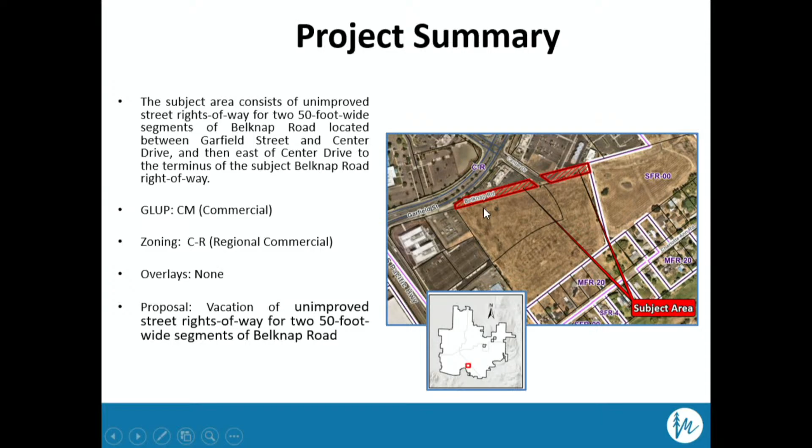Begin by looking at the project summary. So the subject site is located in South Medford. It consists of unimproved street rights-of-way, both 50-foot wide, on each end of the terminus of Center Drive. We're all familiar with the surrounding area.

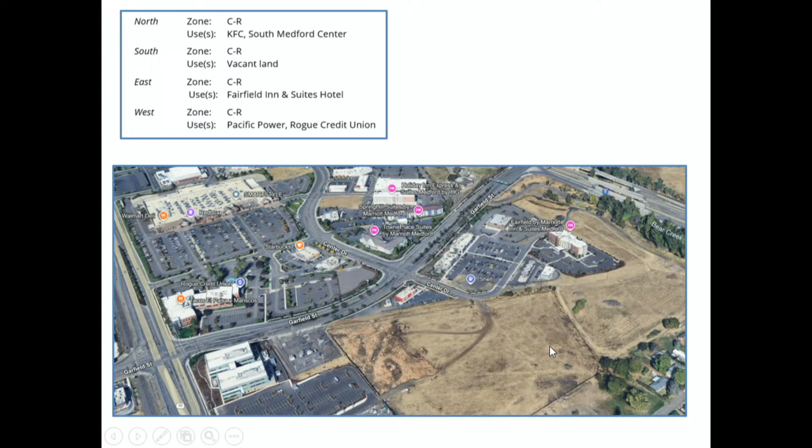Just abutting the property to the north, or the vacation area to the north, is the KFC. You have the South Medford Center to the north. You have the Fairfield Hotel. And just to the south of the property is a large vacant area, and this was, just last year, approved by this body for a subdivision by the applicant CEG, and it's their intent to develop in the future with commercial developments.

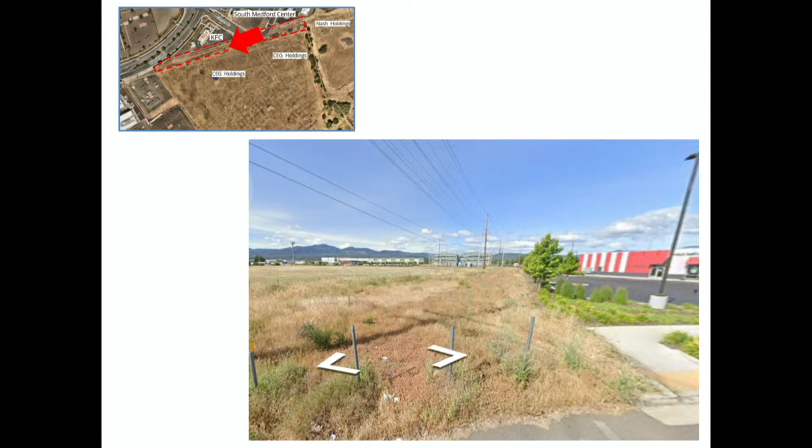Here's a couple of images of the site. This is looking west from the end of Center Drive, and this is looking east. So Belknap Road is currently, as you can see, an unimproved right-of-way.

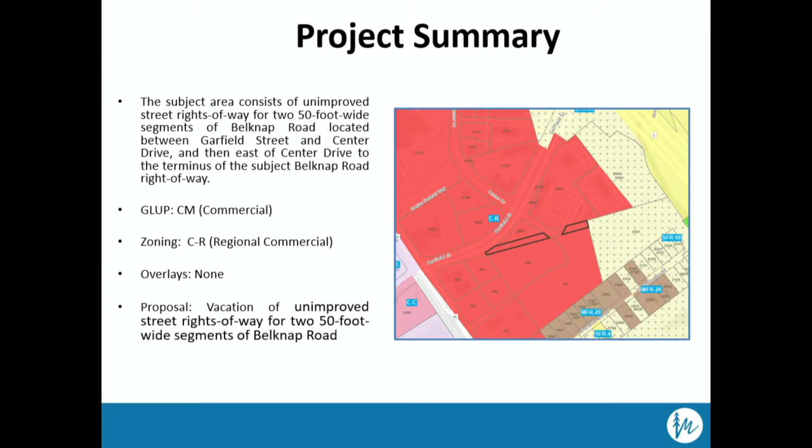Site's general land use plan designation is commercial. The underlying zoning classification is regional commercial. There's no overlays associated with the site. And again, the proposal is for the vacation of two 50-foot wide strips of Belknap Road.

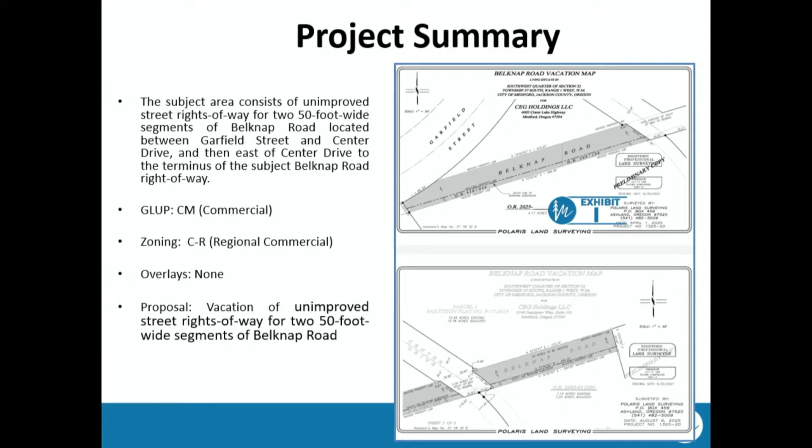Moving along, I'll give you a little bit of history. This vacation was approved on Belknap in 2017, as you can see in the exhibit map. At the time, they vacated just 0.38 acres. It was proposed to vacate the entire area at that time. However, the owners at that time only wanted the 0.38 done.

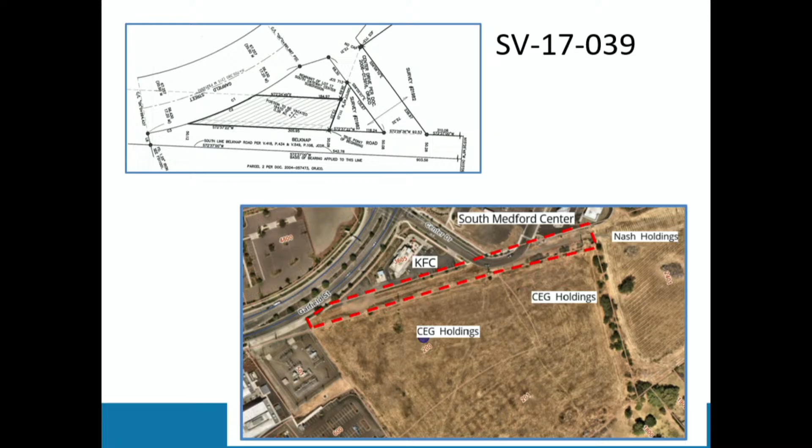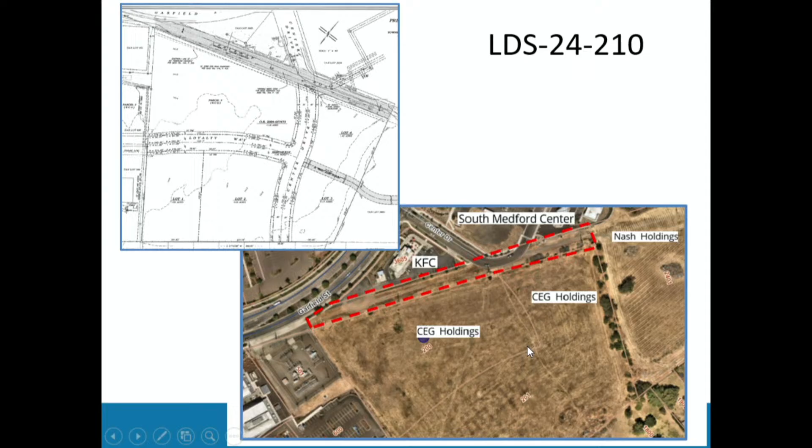And finally, the request is again for each end of Center Drive, these 50-foot wide strips of right-of-way. Upon the approval, the land will be vested to the two adjoining property owners.

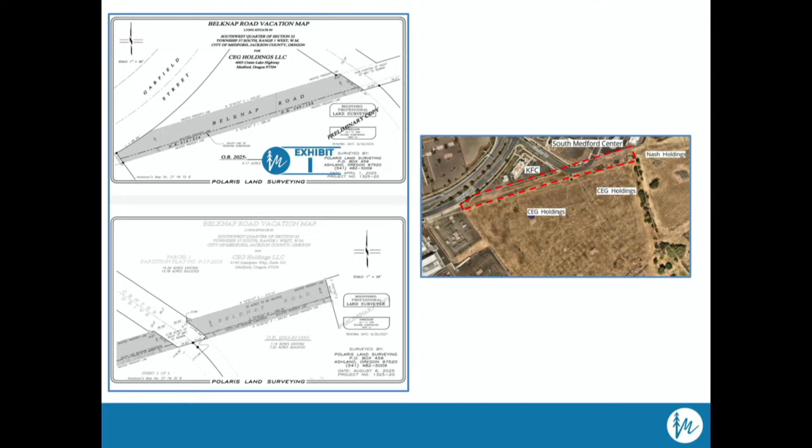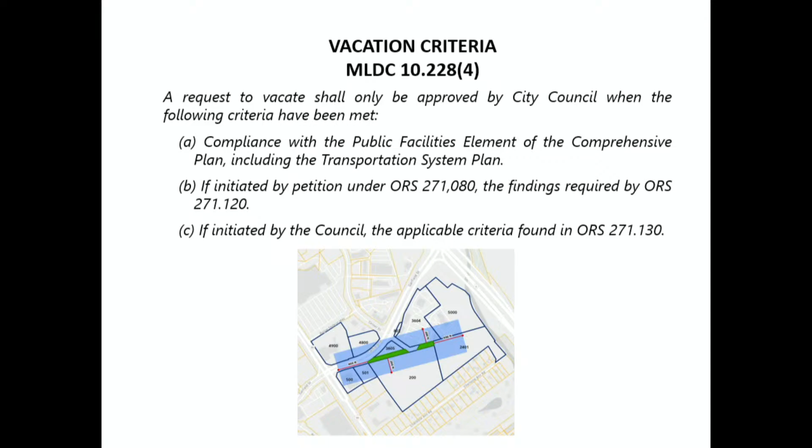So we're right into our findings and recommendations. The commission can find that the criteria have been satisfied. The applicant did provide this map of the affected areas. So we received no oppositions from any adjoining or affected property owners throughout this project.

So they do meet the criteria. Based on the findings and conclusions that all the approval criteria are met or are not applicable, we ask that you forward a favorable recommendation to City Council for approval of SV 25-141. That's per the staff report dated September 4th, 2025, and it includes exhibits A through L. And with that, I can take questions.

Thank you. Okay, thank you, Dustin. Any questions of staff? Okay, not seeing any, thank you. So with that, we will open the public hearing and ask the applicant or their agent to come forward and talk about the project.

Good evening, Commissioners. My name is Seth Adams. I'm with CSA Planning. We have offices at 4497 Brown Ridge Terrace here in Medford.

We are the agents for CEG Holdings, which owns the L-shaped parcel of 7 acres to the south, which Dustin just mentioned is currently starting public improvements for a subdivision. Rogue Credit Union now owns the other abutting parcel to the south.

Throughout this process, our clients have coordinated a lot with the city, as well as the abutting property owners, being Rogue Credit Union and Nash Holdings, who also own the South Medford Center. So I'm just here to say our clients are fully in support of the vacation, and based on our coordination with the other property owners, we presume that they also support the request.

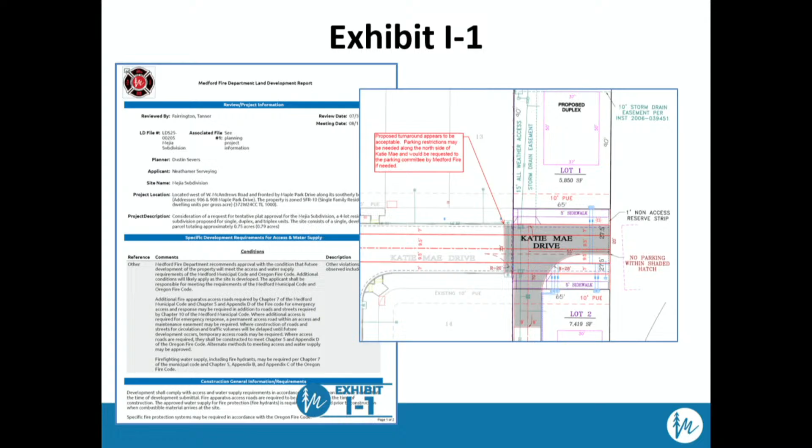In their original report, they asked that the applicant provide an illustration of how they're going to meet the turnaround standards for their fire trucks. Since the time the staff report was published, the applicant did meet with the fire department officials, and they did come up with this illustration on the screen, so that has been satisfied. So we'd like to include Exhibit I-1, which will replace Exhibit I.

Looking at our project summary, the site consists of a single developed parcel totaling approximately 0.75 acres. There currently is a single-family residence on the property. There's also some accessory structures. The property is fronted by Maple Park Drive along its southerly boundary.

Maple Park Drive is a Jackson County maintained road. It's classified as a standard residential street. You also have Katie Mae Drive to the north. It's terminated at the westerly boundary of the site. So with the development of this parcel, they will be extending Katie Mae Drive to this easterly boundary where they will run dead into this house that is constructed here.

So to address the elephant in the room, this house was approved, I believe, well before Katie Mae was constructed, with the Dahl subdivision. Hopefully something will happen in the future and we'll eventually be able to make it to the east. But we certainly have a clear trajectory to go west to make a connection to where Katie Mae is currently terminated.

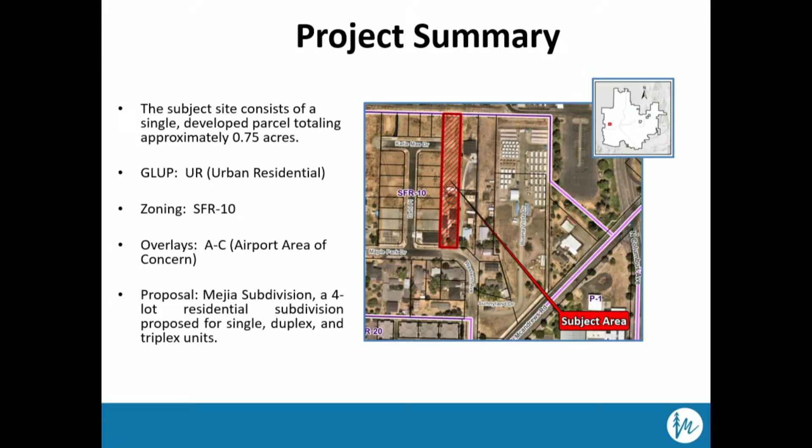Look at the surrounding area. To the north is industrial, also some industrial. Actually, this is the camp. I believe that's the urban campground to the east. Abutting the property is the Dahl Place subdivision, though this image is a little outdated. I believe all the homes here have been constructed at this point, and it's single-family residential to the south.

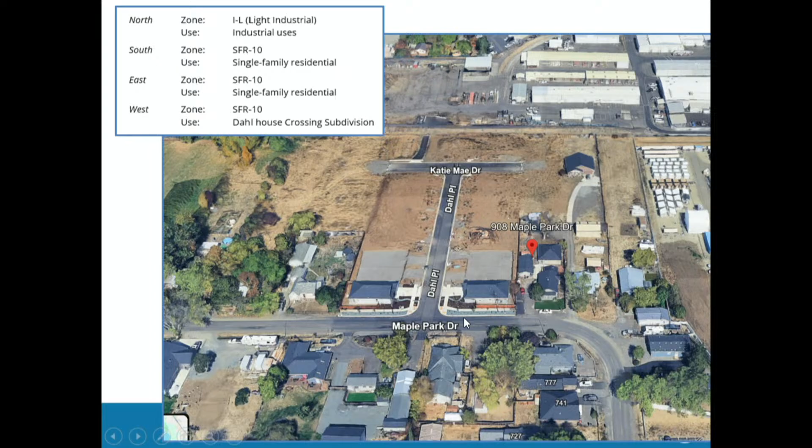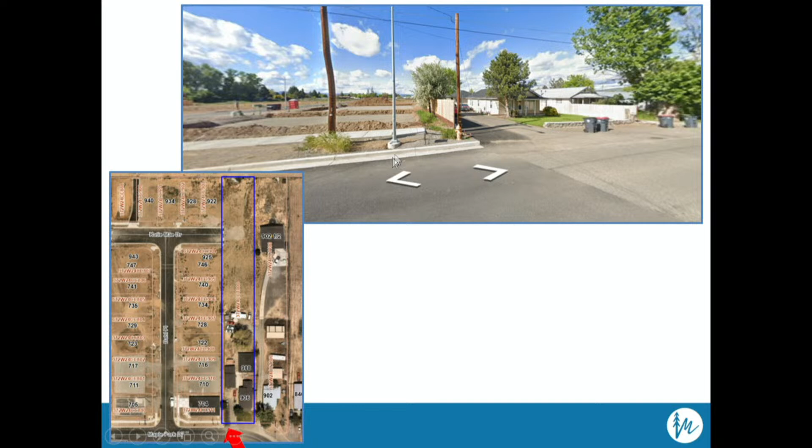Here's an image of the subject site looking north from Maple Park Drive. Again, this is outdated. All these homes have been constructed on Dahl Place.

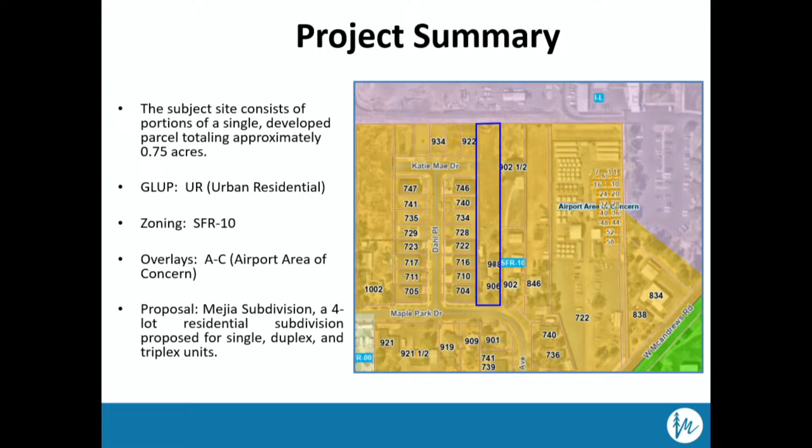Site general land use plan designation is urban residential. Its zoning is SFR 10. It's in the airport area of concern. The proposal is for the Mejia subdivision, a 4-lot residential subdivision proposed for single, duplex, and triplex lots.

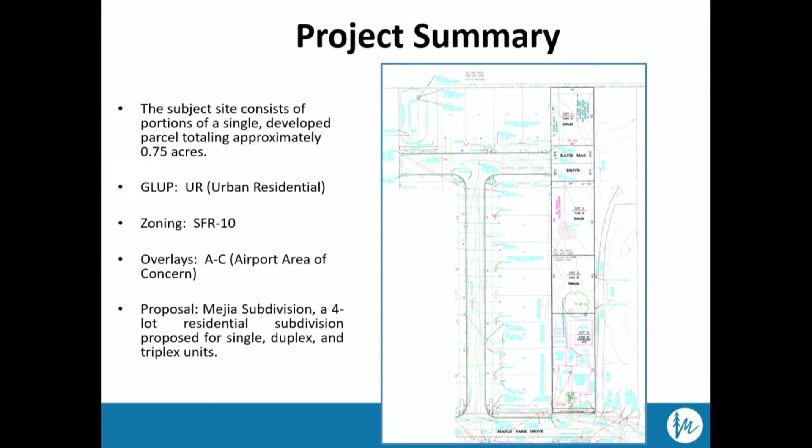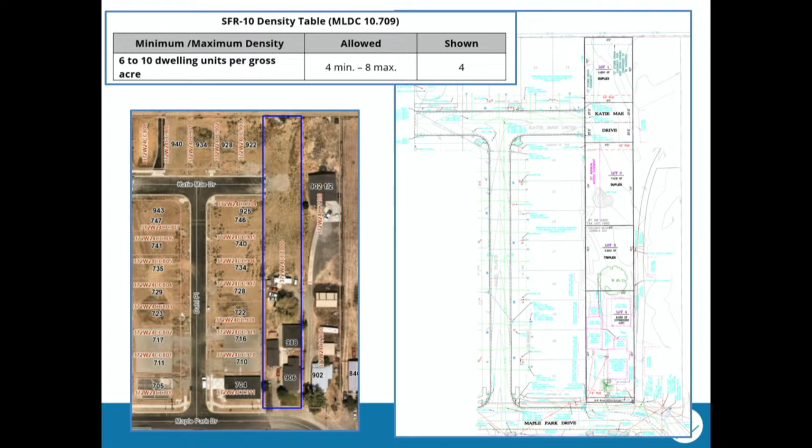The first thing we'll look at is density. Based on 0.79 gross acres, 4 units does meet the minimum requirement for the zoning and the size of the lot. Next, we'll look at the dimensional standards for the SFR 10 district.

So this one's a little unique. They're proposing standard lots, duplex lots, and triplex lots, which all have different dimensional requirements. First, we'll look at the duplex lots, lots 1 and 2. They meet all of our dimensional requirements.

Lot 3 is proposed for a triplex. I should also point out that lots 2 and 3 have a proposed minor minimum access easement, which does require an extra 10 feet of width, and they do satisfy that requirement.

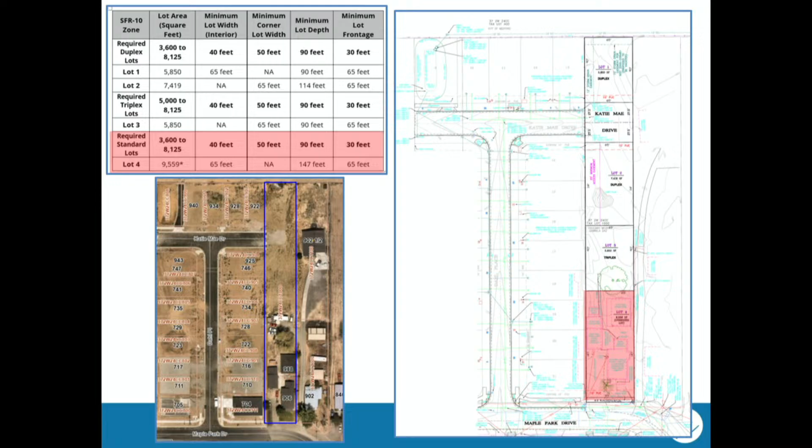Finally, you have lot 4, which is proposed as a standard lot. It is also proposed as an oversized lot. Anytime you have an existing house in a yard area, it's allowed to be oversized, up to twice the maximum size of the underlying zone, which does meet that requirement.

Going back to the minimum access easement, a minor minimum access easement is 20 feet in width. It can serve a minimum of 2 and a maximum of 3 units, not counting ADUs. As you can see, they are proposing a triplex to the south, which will max out the number of units and take access off this minimum access easement. Therefore, lot 2 will have to have a separate access to get onto their property.

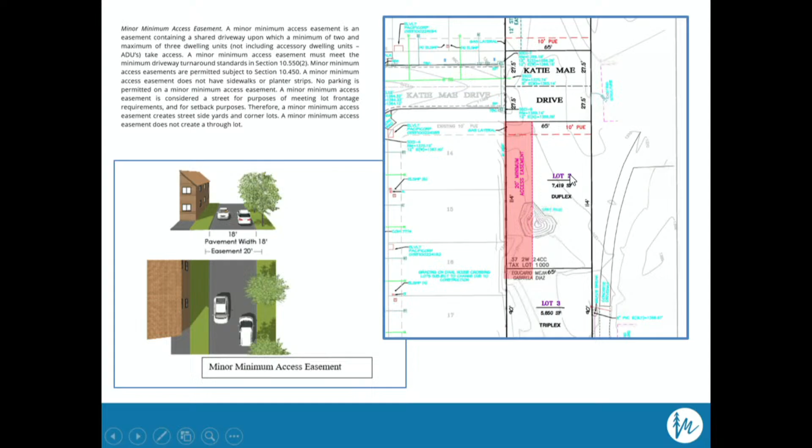Now I'll go right into our findings and recommendations. Pretty simple one: staff has reviewed the applicant's findings and conclusions and recommends the commission adopt the findings as presented. We ask that you adopt the findings as provided by the applicant and direct staff to prepare the final order for approval of LDS 25-205, per the staff report dated September 4th, 2025, including exhibits A through K, and also including exhibit I-1 replacing exhibit I. With that, I can take questions.

Thank you, Dustin. Any questions? Mr. Chairman? Yes, sir.

Mr. Severs, in your report and testimony, I didn't hear any exceptions. Are there any exceptions to applicable standards for this application, or does this application meet all the standards that are applicable? The application meets all the standards that are applicable.

Thank you. Any other questions? I guess I have one. So we're talking about Lot 1 and Lot 2 being duplexes, so that's 4 units, right?

And the triplex would be units 5, 6, 7, with lot 4 being the remaining one. My understanding is that since it's shown on a plat, they'll be required to do what's shown on the plat. In this case, they will have to put a triplex on the property because they put it on the plat.

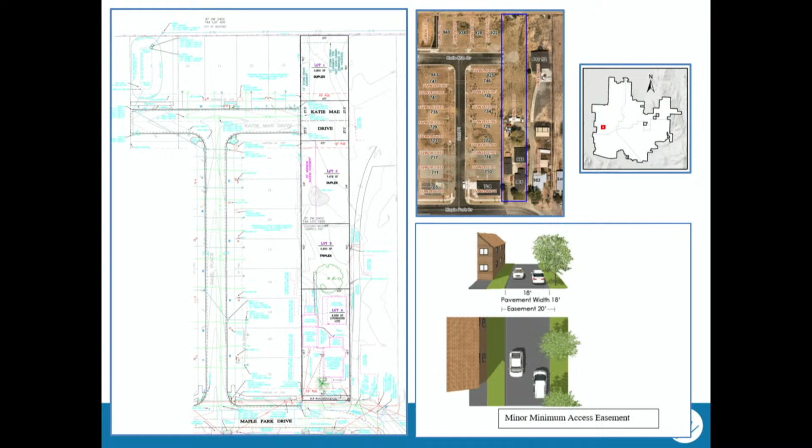Any questions for me? I'm seeing none. Okay, so thank you. Okay, do we have anybody else that would like to come and speak regarding this application? All right, seeing none.

Do we have any additional comments from planning? None, thank you. Engineering? Legal? No. Okay, Mr. Needhammer, would you like to offer some rebuttal?

Thank you, Mr. Chair. I'm not sure of the driveway that was mentioned, but I don't have any control over off-site driveways. The criteria has been satisfied. The dwellings that are in Lot 4 have all been approved and satisfy the requirements as well.

And we will be barricading the end of Katie Mae Drive once the streets are constructed. It looked like from your map that the pavement actually does not go to the property line. It's back a bit—I saw a reserved strip. Katie Mae will go to the property line, but there is a one-foot strip through there, a separation that's controlled by the city, and that's where the barricade will be. Okay, all right, thank you.

Thank you. Okay, with that, we will close the public hearing. And do we have a motion for consideration?

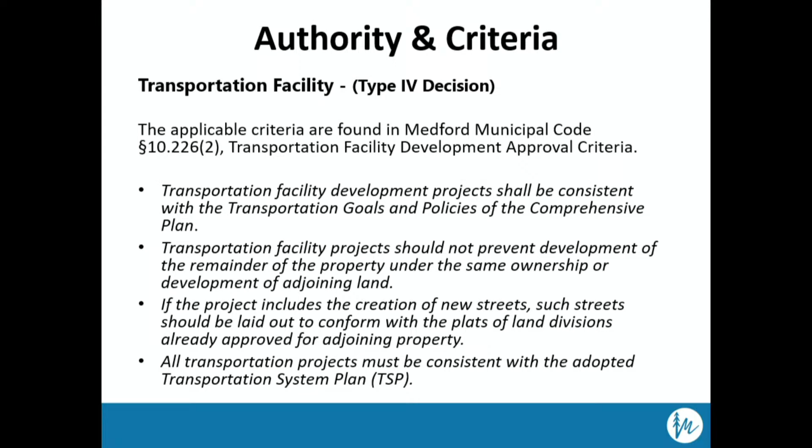The proposal is improvements to a portion of Edwards Street to a modified minor collector street cross-section. The Planning Commission is the recommending body to the City Council for transportation facilities. The City Council is the approval authority. The criteria for a transportation facility is shown here on the screen. All of the criteria has been addressed in the staff report and found to be either not applicable or satisfied.

As I mentioned at your study session, TFs, or transportation facilities, are required when a new street or an existing street is proposed for improvements to a modified cross-section as opposed to the standard cross-section. The proposed street we're talking about tonight is an existing street, Edwards Street. The portion planned for improvement is between Niantic Street to the west and North Riverside to the east, located in Liberty Park, just north of downtown.

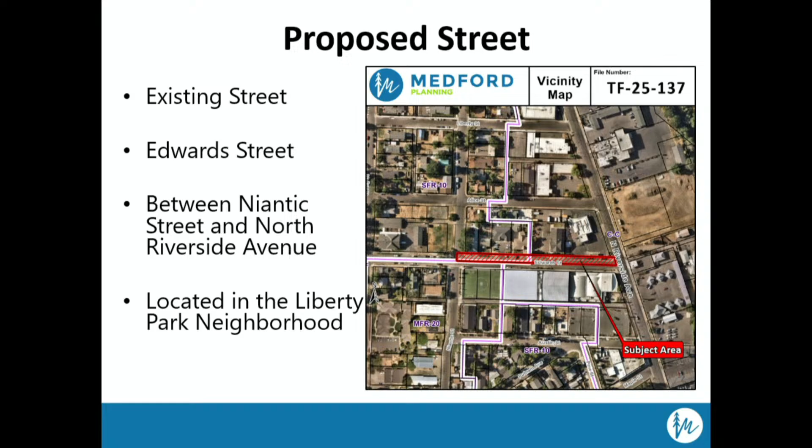This project has been identified in city plans, including the transportation plan, the Liberty Park plan, and the city center revitalization plan. It's a fully funded project through the Medford Urban Renewal Agency.

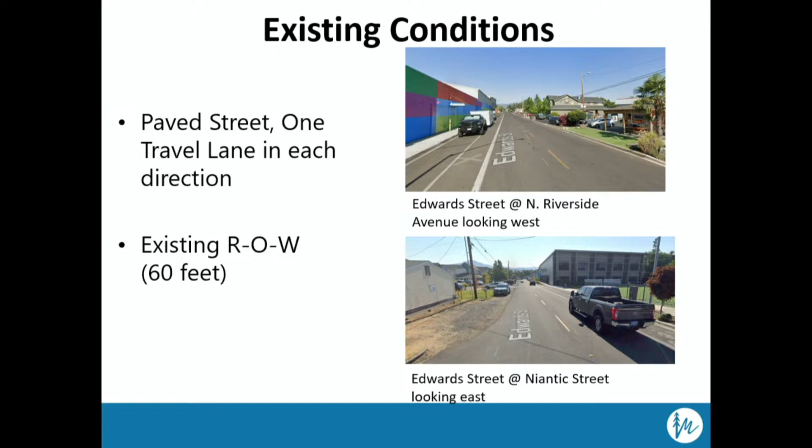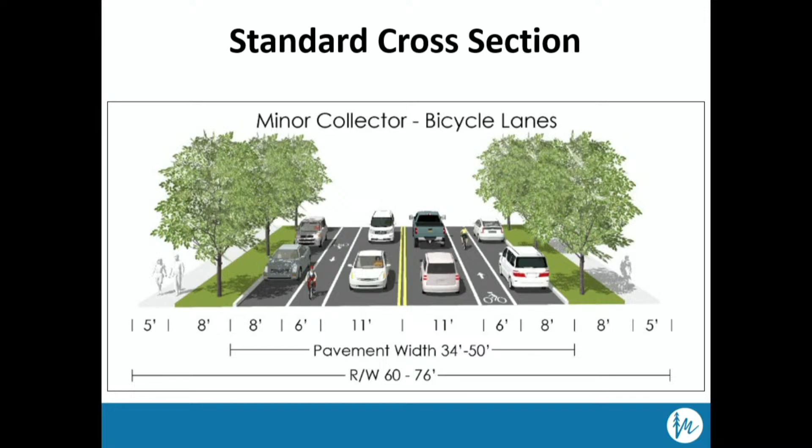This shows the standard cross-section for a minor collector street, which Edwards is. That includes typically a 5-foot sidewalk, 8-foot park strip, an 8-foot on-street parking strip, a 6-foot bike lane, and an 11-foot wide travel lane on both sides. To do all of that, the total would typically be 76 feet. Again, what we're working with on Edwards is 60 feet.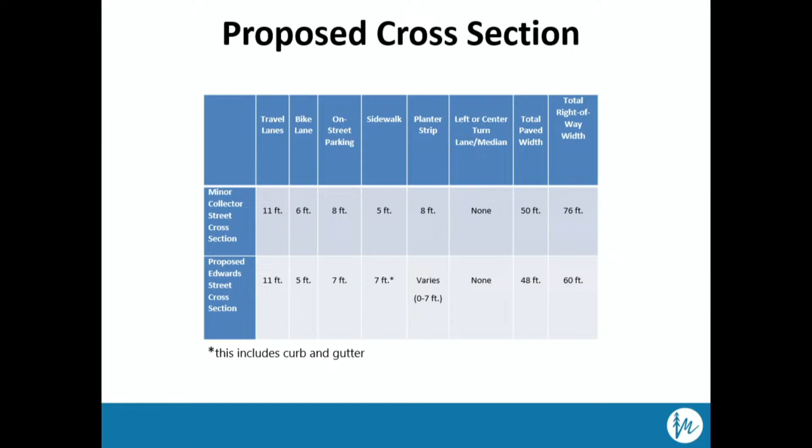One thing I did not mention at your study session that I wanted to mention is that when I show a 7-foot sidewalk, it's really 6.5 feet, because there's also a half foot for the curb and gutter, which I didn't even think about, but I just want to mention that.

So as I told you before, this has gone before the Transportation Commission, the Active Transportation Advisory Committee, and then at your study session on August 25th. So it has been reviewed by all these bodies.

Now, one of the questions that came up at your study session was what the traffic counts for this portion of Edwards is. We don't have any up-to-date information, but we have our counts from 2018 and one from 2020. The number is greatly reduced in 2020, and I think we can all agree that's probably not a great year for counts, since there wasn't as much traffic that year. People were kind of hunkered down. So we don't have up-to-date counts, so we really can't say what the current counts would be.

The traffic engineer said that the numbers probably are a little bit low for a minor collector, but would be high for a lower order street. So I wanted to answer hopefully that answers the questions on the traffic counts to some degree and why this street is classified as a minor collector.

As I mentioned before at your study session, the Transportation Commission and the Active Transportation Advisory Committee both suggest that we use the standard widths for the bike lane, the on-street parking, and the sidewalk. That may be the recommendation you want to make as well tonight, but I do have some additional information as to why the city is proposing the wider sidewalk.

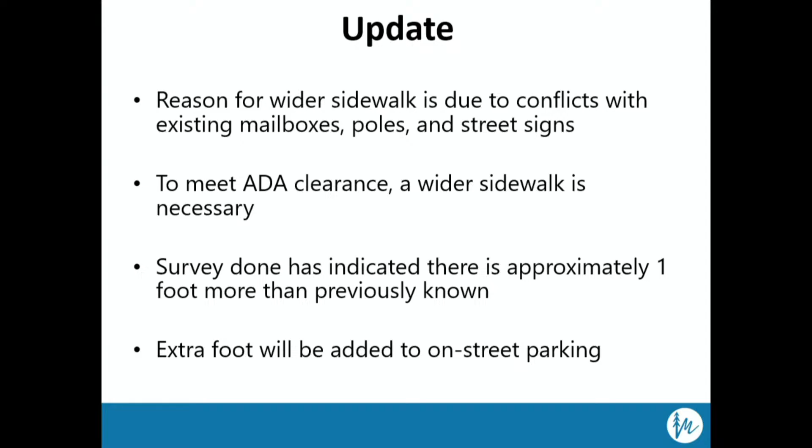A survey has been done, and it looks like we do have an additional foot of right-of-way. That additional foot the city is suggesting would go to the on-street parking, so it would meet the standard amount. So we would just be looking at really reducing the bike lane by 1 foot. I hope that helps give you some idea as to why we're proposing it the way we are. I want to make sure you understood the reasoning for that wider sidewalk.

The next step is a city council meeting that's scheduled for October 1st. And with that, we're hoping that you will forward a favorable recommendation to the city council for approval.

Of TF 25-037 per the staff report. It is September 4th, 2025, including all the exhibits.

Now, I wanted to also tell you, I normally wouldn't put the motion up here, but I do have two motions for you, and maybe neither will be what you want. I have just the motion if you wanted to forward a favorable recommendation based on the plans before you, the city's proposal, and then if you preferred the recommendation from the Transportation Commission, we have the alternate motion here. So either motion would work, but I just wanted to have both available to you.

I also want to mention that we don't have our agent from Mira here tonight, so we'll just do our best to answer any questions you might have, or I'll do my best to answer any questions you might have.

Thank you. Okay, thank you, Sarah. Do we have, yes, sir?

Sarah, thank you very much for chasing down those traffic counts, and that's helpful. I had just a quick question.

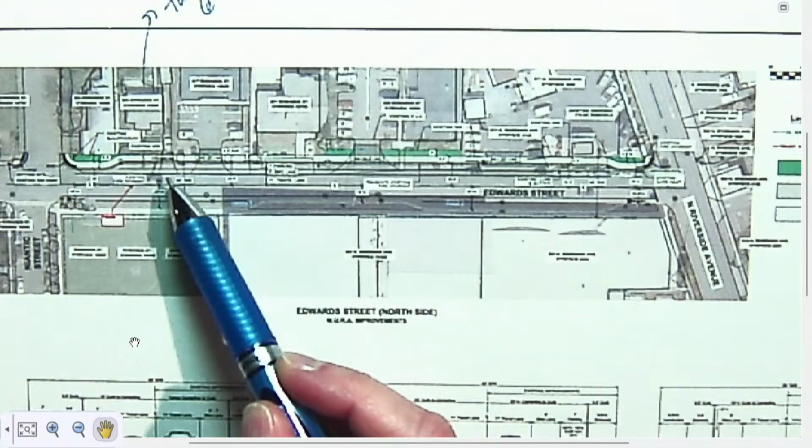That looks like... So I guess my question there mostly is on the right side of the building, or the east side. That concrete, I guess that won't be used as a driveway then after this improvement's done. I guess maybe that's my question.

Well, we can certainly ask the question, I don't have an answer for you tonight on that. Is there Commissioner... any suggestion on this, or you just came more like... That was it, yeah. Okay.

Well, sorry about that. I guess I don't... You have a question? No, I just want to say, looking at a detailed blow-up on aerial maps,

that access for that house does go all the way back to what looks like a garage, and their entire front of that house is their front yard. So there's no turnaround access. They'd have to back it out. May not be possible. Right, thank you.

Okay, any other questions? I've got a number of them. It's hard to see on this, but 521, I believe, is, yes, that one. Those people, that is all pull-in parking on that. There is no, yep, so they back into the street.

And then on the corner of Riverside, Sign Dude has actually fenced in all the area along the current, not the right-of-way, but the current edge of the sidewalk, current edge of the pavement. So do these people know this is coming?